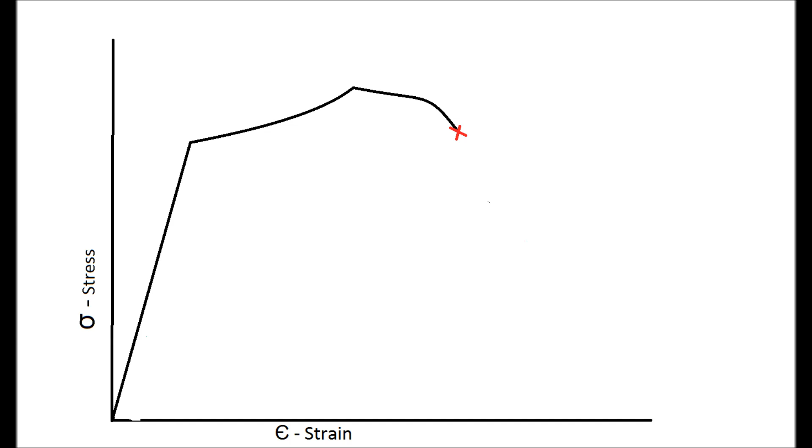A stress strain diagram is the graphical comparison of stress, that is in the y-axis, and strain, that is in the x-axis. Stress, which is usually expressed as Greek letter sigma, is measured as force over cross-sectional area. For example, in this rod P is the tensile force acting on it, and R is the radius of the cross-sectional area. To calculate stress, you divide P, which is the force, by the cross-sectional area.

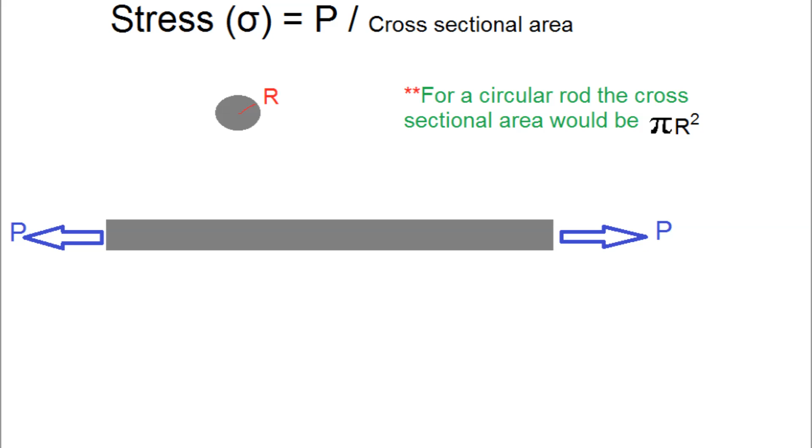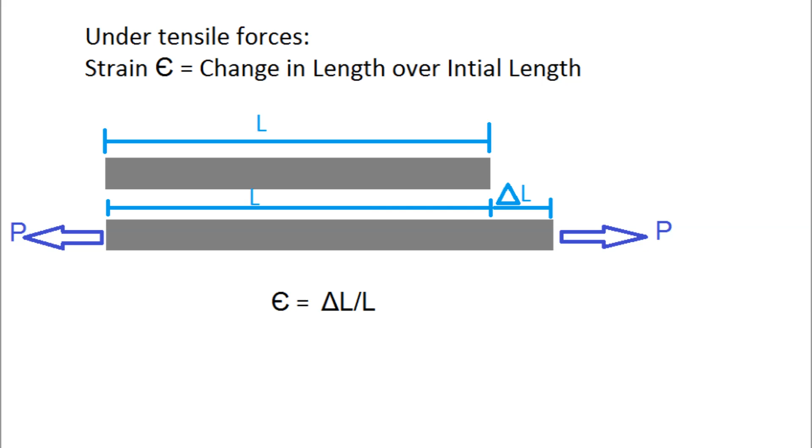Strain, which is most commonly expressed as Greek letter epsilon, is calculated as the ratio between change in length divided by its initial length. For example, a metal bar is initially 1 meter long. It is put under tension and stretched out to 1.1 meters long. The strain of that would be 0.1, and the strain is proportional, so it is unitless.

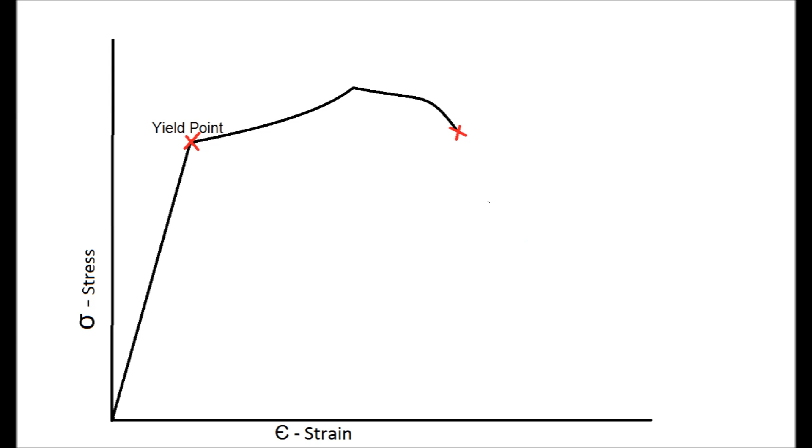The yield point is where permanent deformation starts to occur. It is where the elastic region ends and the plastic region begins. The factor of safety is the ratio of the yield point stress divided by the desired design capacity. For example, if you have a load of 500 Pascals applied to a rod, and you wanted a factor of safety of 2, you'd want a rod with a material that's got a yield point that is at least 1000 Pascals.

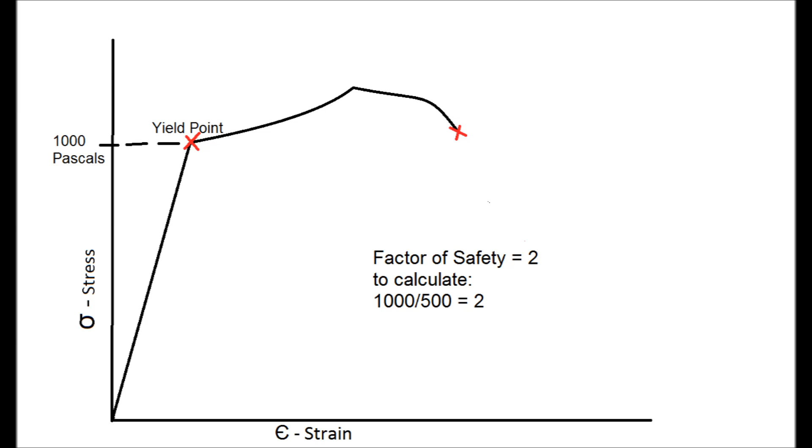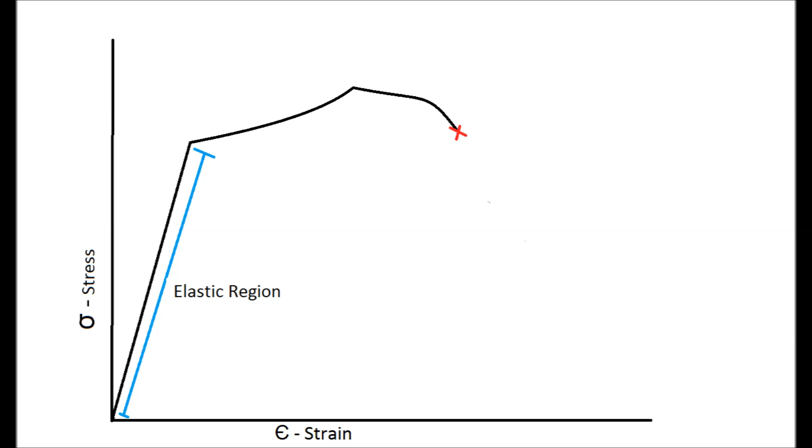The elastic region of the stress strain diagram is where the graph is linear all the way to the yield point. In the elastic region, the material is under forces, but the deformations are not permanent. A rubber band has a very large elastic region, while an aluminum wire has a very short one. The proportional limit is where the line stops being linear and begins to curve. The yield point and elastic limit follow shortly after.

The plastic region of the diagram is where permanent deformation occurs. For example, if you were to take a spoon and bend it a small amount, it'll bounce back to its original shape, while if you put a lot of force on it, even when the force is removed, it will still retain some of its deformation.

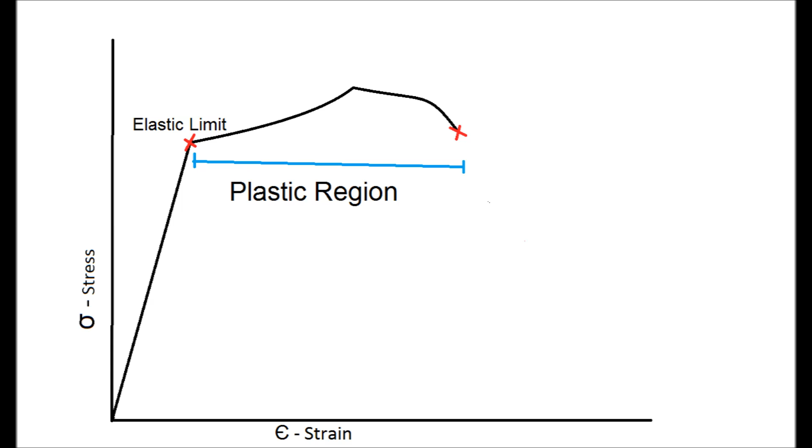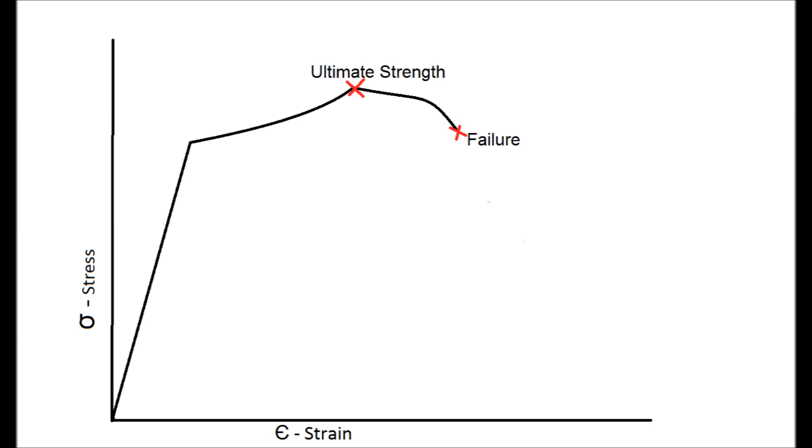Ultimate strength, also known as tensile strength, is the maximum stress a material can withstand without failure. It is the highest point on the diagram. The reason the graph proceeds to drop after the ultimate strength is because the cross-sectional area starts to decrease as the material starts to experience plastic deformation and sometimes necking before its final fracture.